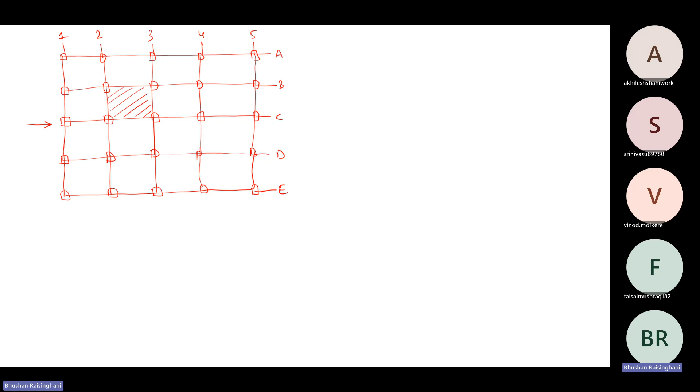Let's say this is the central frame that I am targeting to analyze. I will name the grid A, B, C, D, and E. And this will be 1. So it is 5 by 1, 2, 3, 4, 5 - a 5 by 5 grid. So in ETABS, when you enter the grid, it will be 5 by 5, or similar to what I have shared with you, you can use the same.

Now this is the frame of interest for me. These columns and beams are of interest for me to analyze in 2D. So in 2D, I can only solve this particular frame.

However, as per the soft requirement of the code, you have to do 3D analysis only for the building. So whatever 2D analysis you are doing is only for reference, comparison, and preliminary design. However, when you are doing analysis for any building, as per IS 1893, it is clearly mentioned to do three-dimensional analysis of the building. So you have to do three-dimensional analysis only. For that purpose, you will use the software.

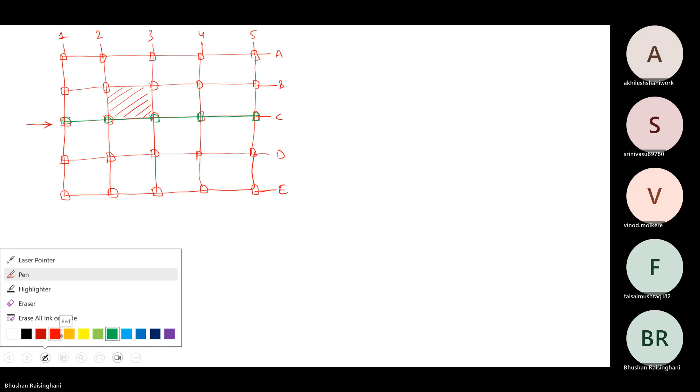So when you see how much area is participating for this frame, I will hatch that portion. This full area will not be participating. Half of the area on top, half of the area on bottom will come into picture - half area above the slab and half area below the slab. So this is the effective width you are going to consider for estimation of the load for this particular frame.

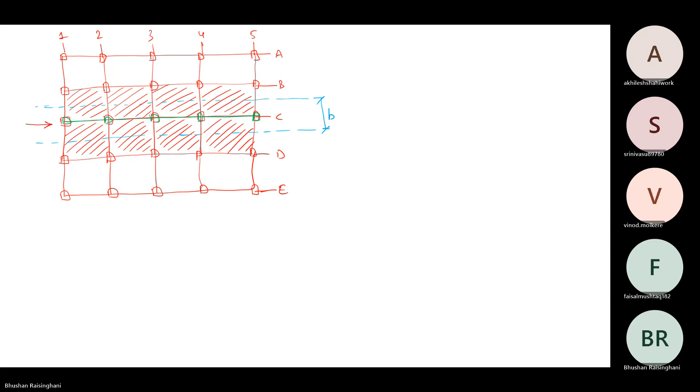Now, if you look into this arrangement, let me take this particular slab, which I am double hatching, for analysis. Because first, what will you do for this particular frame is the gravity load. So what are the gravity loads? First we have to list it out - gravity loads, what loads are required.

So in gravity load, we are using IS 875 part 1, that is for dead load and super dead load, and IS 875 part 2 for live load. Both you should have referred - what type of building it is, the type of loading changes. If it is an assembly building, institutional building, or a residential building, based on that the load criteria have been given. For different materials, the dead loads are given, density is mentioned. So that way you have to refer those codes, and from that you have to provide those loads. So in gravity load, now you know there is dead load, then there is super dead load, and there is live load.

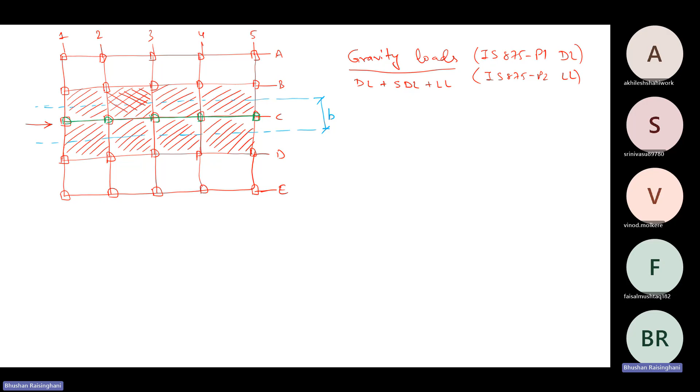And other loads, like there is a water tank load, and landscape would be separate from this, but it is part of super dead load only - though I am mentioning landscape separately. Then there is water tank, then there is landscape, and if any machine is there, so machine load you have to consider.

And there is another load that we take for a different type of arrangement, that would be for the HVAC, or your false ceiling. And other would be your elevator. So all these things we give under the super dead load, and some part, if some part we have to take as live load, we take it, but mostly this comes under the super dead load.

So, elevator - is it a live load or a dead load? That is the question. Has anybody seen the IS code? Elevator load, is it live load or dead load? Can anybody say on that? Sir, by elevator you are referring to lift load - yeah, that's called a live load.

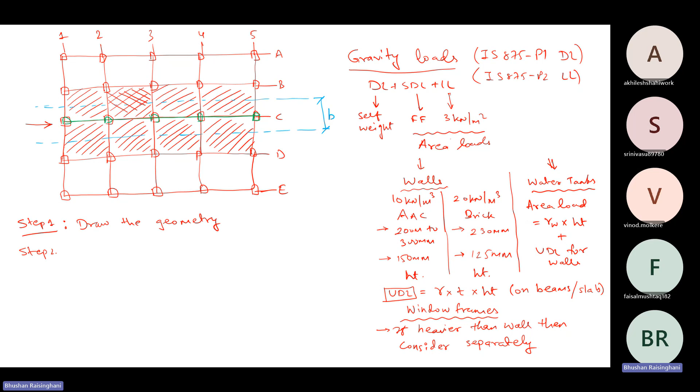So this is all under your super dead load. So what loads to estimate, you should know that first. Whenever you are doing the calculation, the first step you will write is gravity loads. You will list down what are the gravity loads you are going to consider. So step 1 is to draw the geometry. Step 2, enlist all the loads with category.

Step 3 is to estimate the loads and their reactions on the frame elements. Now we are on step 3 that we are going to discuss.

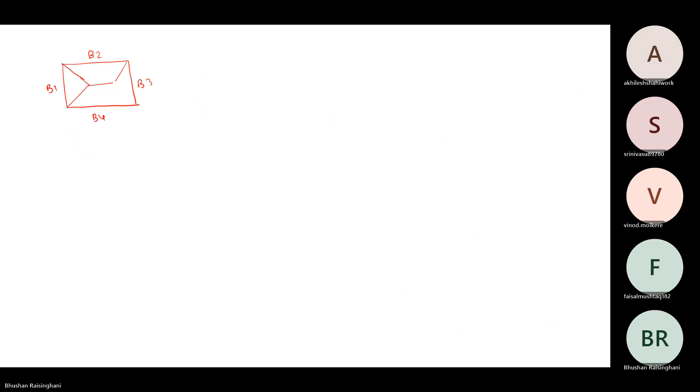So whatever I have highlighted, I'll take it to the next page. If I am on a particular floor plan, taking just one particular slab, I will label this B1, B2, B3, and B4, and this is a two-way slab. So the load distribution will be trapezoidal load onto B2 and B4, and triangular load on B1 and B3. This direction would be LX.

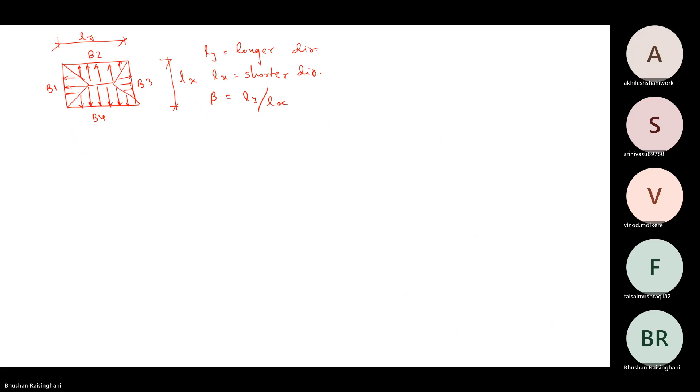This direction would be LY, where LY is the longer direction and LX is the shorter direction. And there is a factor called beta, which equals Ly upon Lx. I have shared these sketches because it is well known. Nothing is hidden about how this load is estimated.

So this way the derivation is given. In this particular case, we have to draw two beams. One is the smaller beam, let's say B1 oblique B3, because load is going to be the same, so there will be a triangular load distribution here. Then there is a longer beam, B2 oblique B4, which will have trapezoidal load.

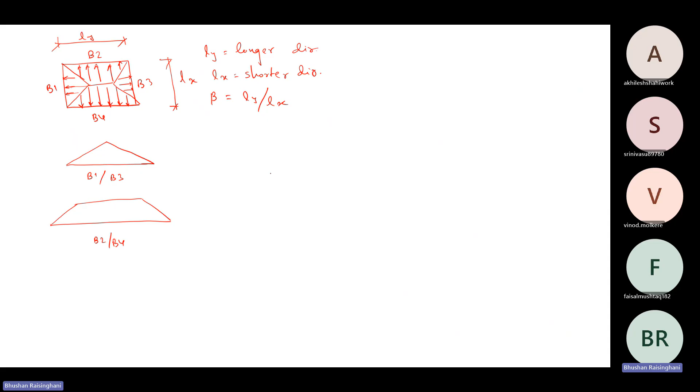Let me open what I have shared. So the intensity of load is going to be the same: Q into Lx by 3, Q into Lx by 2. Many different values are shown at different places. I have also shared two sketches for that. However, what I take in this particular case is given in the book of Shah and Karve also, that the intensity of the triangular load is Q into Lx by 3.

Q is the intensity of load, which is kilonewton per meter square. So whatever kilonewton per meter square load you have applied, you are going to distribute it. We are looking at the load distribution onto the floor for area loads. So this is the area load. Whatever the length Lx is, you divide by 3 into Q, you will get this particular load intensity.

Now you know you will have to calculate based on the triangle, whatever the CG is there, based on that how to estimate this force, and bending moment you need to estimate. So in this particular case, what is the value of the force?

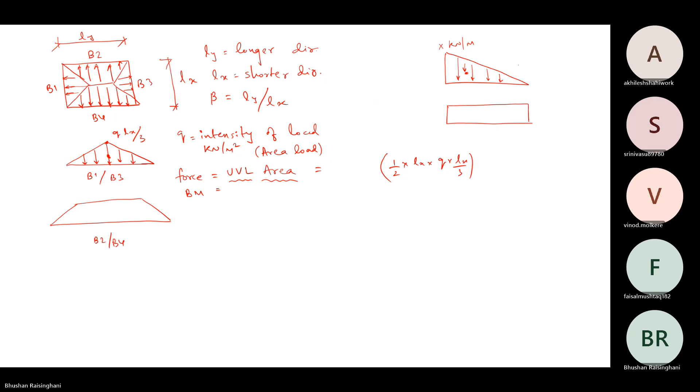So I will draw similar for this also, this way. This is also X kilonewton per meter. So this area is equal to 1/2 into X into L. This area is equal to X into L. So is this equal to force or not?

Yes, sir. Now if I have to take the moment for this, that is a separate calculation. So in this also, if I apply the same logic, it is 1/2 into Q into Lx by 3. Height into base is your Lx, so that will be Q into Lx square by 6, right?

So force applied directly in the center. Now there is another case, that there is an equivalent UDL. So this was a UVL that we did the analysis. Now if I want to draw equivalent UDL for this, I don't want to make a triangle, I want to convert it into an equivalent UDL.

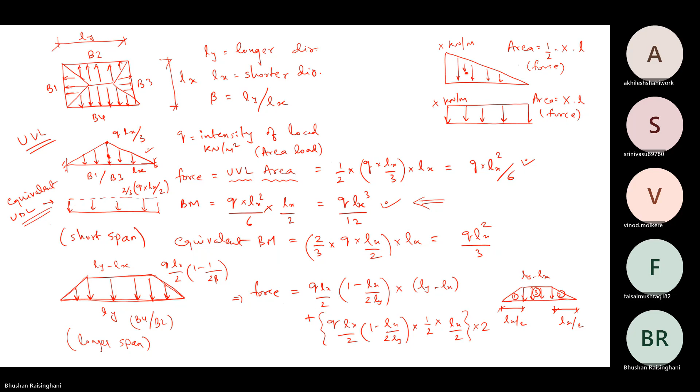So is the load distribution and calculation of the force and bending moment clear to you? Then we can move to the next step. So this is for two-way slabs.

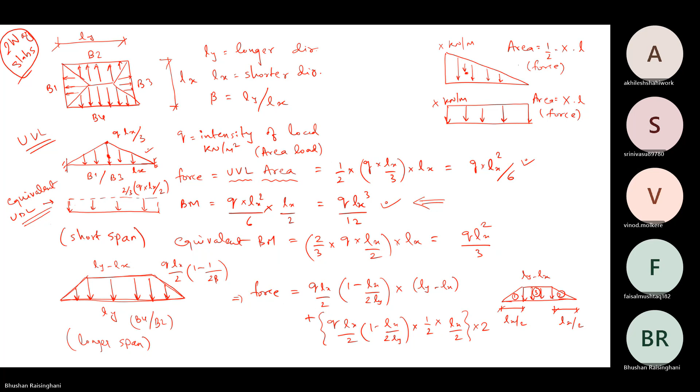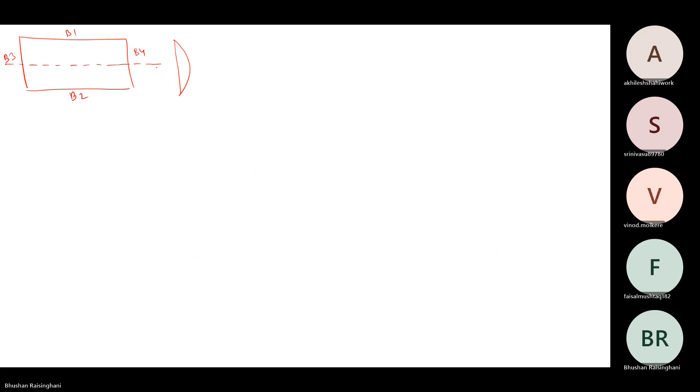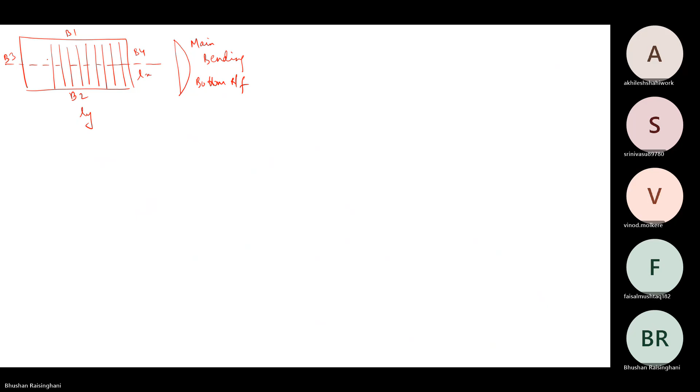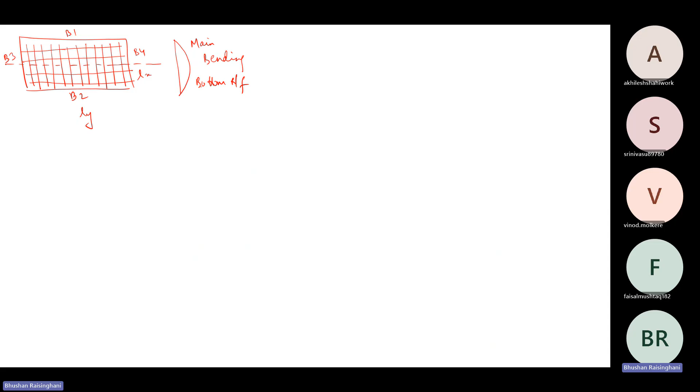So the bending direction is this, the main bending. So bottom reinforcement has to be in this particular direction. If this is the bending that is happening, the reinforcement will be like this. This will be the main reinforcement on the one-way slab, and this direction would be the secondary reinforcement, which may be at higher distance. We call it distribution steel, and the bending will be like this, with distribution steel provided.

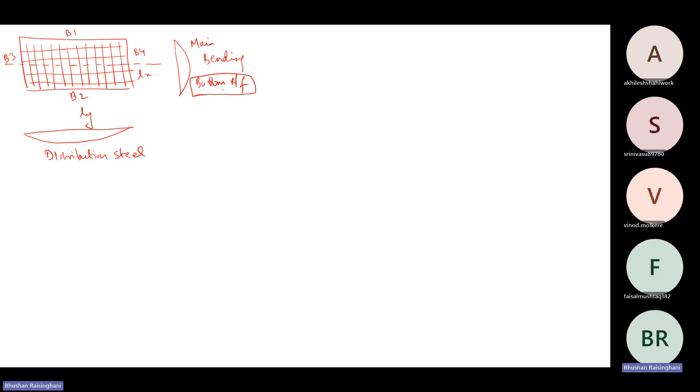I hope the reinforcement distribution is clear to you. Main bending is in the minor, lesser direction, and the bottom reinforcement has to come first in that direction. So this will be the bottom reinforcement you will be having. First you place the one reinforcement which is vertical, and above this vertical reinforcement you put reinforcement number 2, which is distribution steel in the horizontal direction. That is how it has to be provided.

If we see a slab which is a one-way slab, if this is the bottom reinforcement, this is your reinforcement 1, and above that this reinforcement is shown as reinforcement 2. So is it correct or not, is this correctly made or not made? Correct, sir. Correct, so if this is Lx, then it is correct.

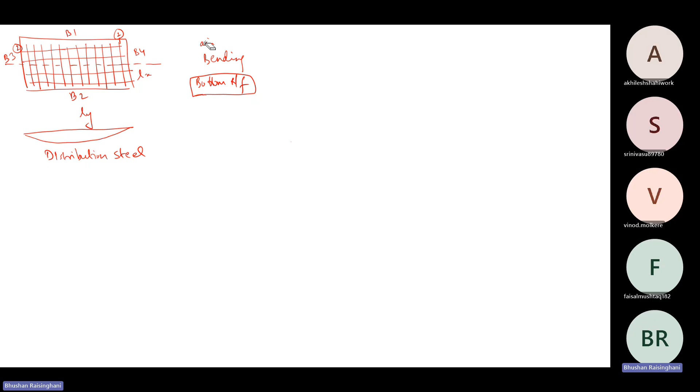Not a span. So that way, that is the detailing part, how the bending is taking place. That is also critical. Where is the main bending happening in a one-way slab? Now the load is equally distributed on B4 and B3.

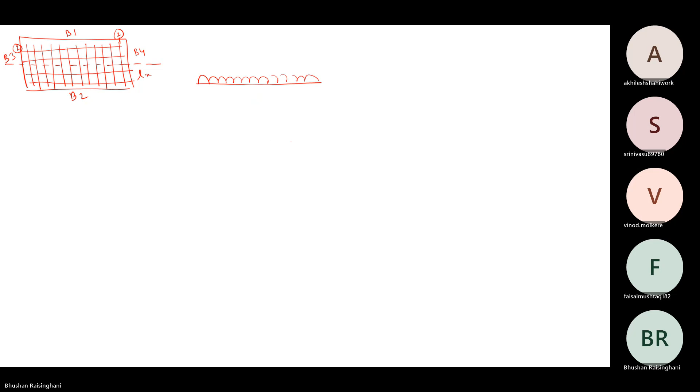So we have to make a beam, give it B3, B4, which is a shorter span, but 100% load distribution is on the shorter span. And this will be how much? It will be Q into Lx by 2. So these are the reactions you will get, this is a fixed beam, I think, taking it here.

So this way you will get the bending moment and shear force from this particular beam. These reactions are critical. Once you get these loads, which are the gravity loads - dead load, superimposed dead load, and live load - they may be area load, UDL load, or UVL load. Once you estimate all the loads and put them onto the beam, you can apply the beam reaction method to obtain the final result, case 1.

That is a very simple and also approximate method. Another way is we can go for the moment distribution method to solve this entire bay. So you can choose your method. Also, I would suggest you do a comparison between the beam reaction method and the moment distribution method, to see which gives you a better result, right?

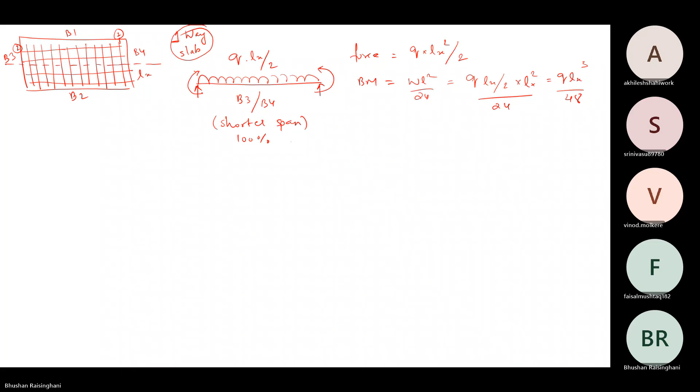So should it be WL square by 24 at the center? Is it like this or what? Is this right or not? It is the bending moment, directly the value is there. Or if I go something like this, Q into Lx by 2 into Lx, this is the force, into Lx by 2, then this answer would be Q into Lx cube by 4. What should be taken? So which is correct from these two?

Anyone? These are very simple cases we are discussing. Can anybody say which is correct? So this is the central moment that I have written. Now if I make it for the ends, this is the end bending moment. So Q into Lx by 2 into Lx square divided by 12, just half of it, Q into Lx cube by 24. This will be at the end, not in these two. Which is the correct bending moment? This is the mid.

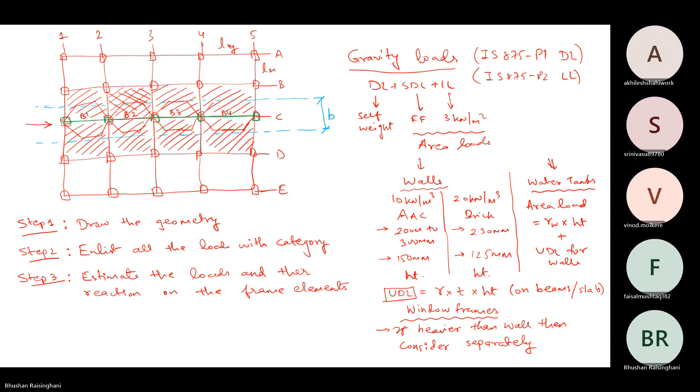So this much is the load that is coming onto this particular frame. So this beam will have these gravity loads coming from it. So all these loads are the area loads that are coming onto it. This area load is dead load or self weight of the slab. Self weight, and this area load is floor finish. Then live load is also there. If water tank load is there, that also has to be considered in the area load.

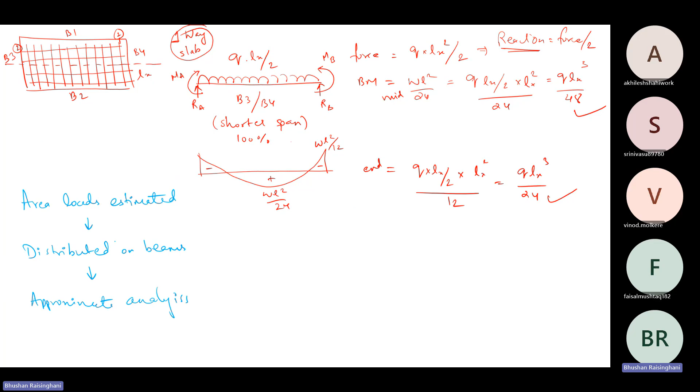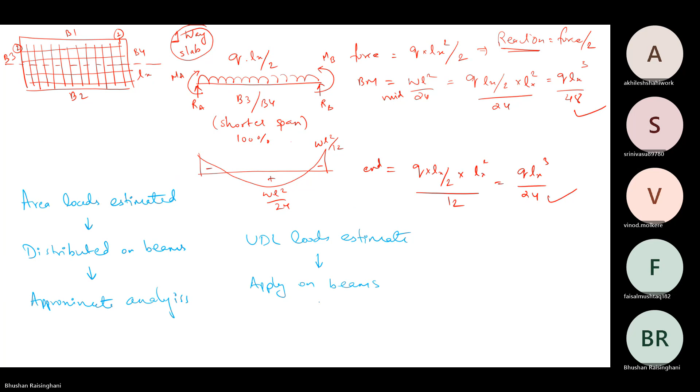So what we have seen is for the area load distribution. So once those area loads are estimated, then they are distributed on beams, and from beams, what we say is that you can apply the approximate methods of analysis for area loads. Now, when it is UDL, you estimate the UDL load, apply on beams, and then do approximate analysis. So you have to total all these loads that are coming onto the beam. So you have estimated loads.

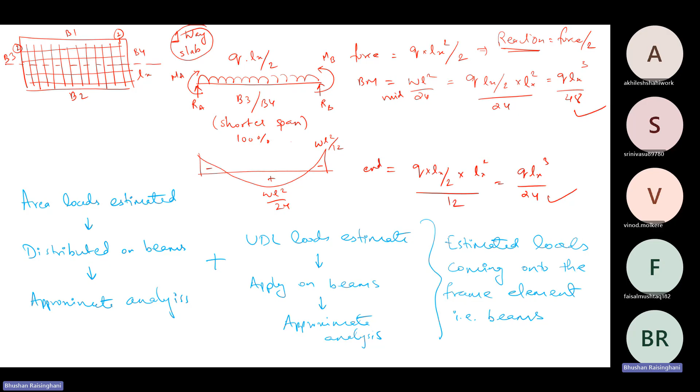Which is the frame element that is taking the loads are the beams. So you have to estimate all loads coming onto the frame element, that is the beam, and then transfer it to the columns and from columns to the footing. So that is called the beam reaction method. One is the beam reaction method.

And this is the most common method that is used. So whatever the load you have estimated on a beam, that is the UDL. Also point loads may also be there that are to be estimated.

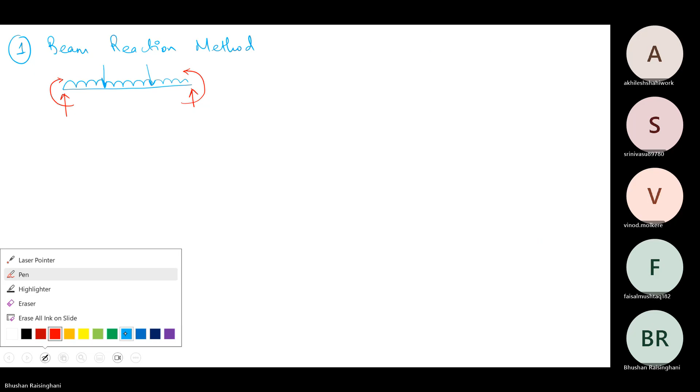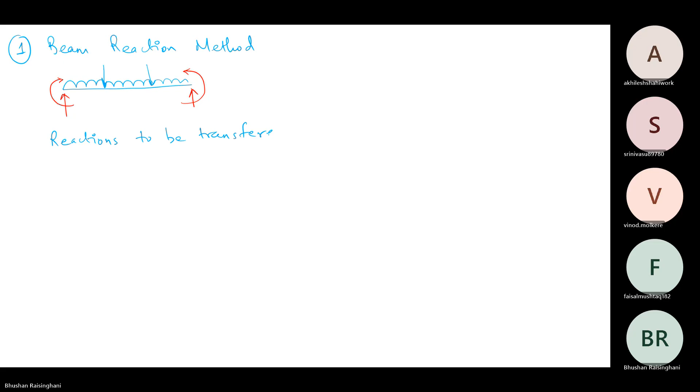I'll draw reactions with a different color to focus on what is the requirement. So these forces are the required product that is to be used in the beam reaction method. So these reactions will be transferred to the columns.

So in gravity load, there is no stiffness difference in the column, and hence we are dividing it appropriately. However, you also know that in which direction you have to consider the loads, you have to take it that way.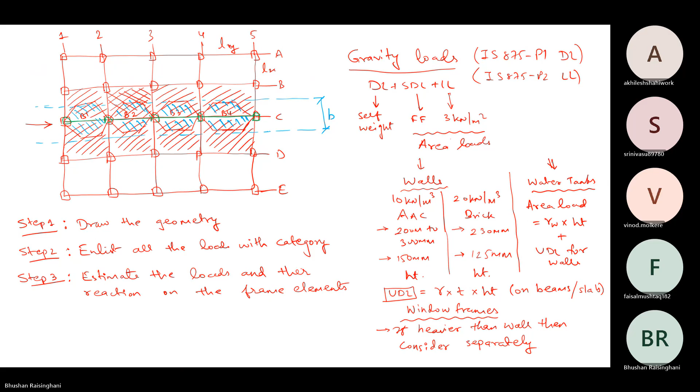So in one direction, I had marked this blue strip for the estimation of the loads. This blue strip is in this direction, meaning these loads are estimated. The strip can be in the other direction also. So you have to select the direction of the strip for estimating the load. I hope I am clear on that particular case.

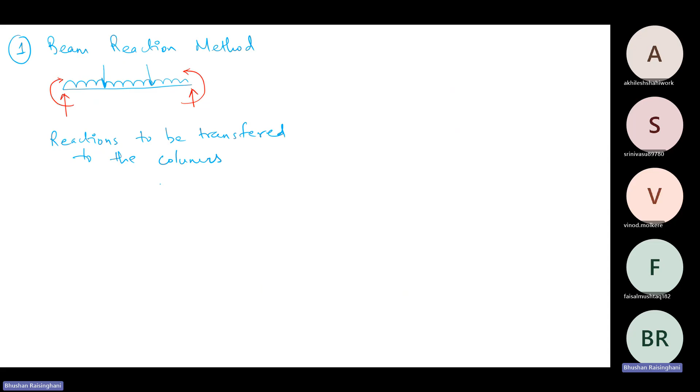So one-way distribution, two-way distribution, how it is going to be, how you estimated the strip. Now reactions are transferred to columns, then from columns to footing. And that is the base reaction.

So the hierarchy is like this. This is the slab that we had considered, the floor we had considered. We had beams below these floors. And we have taken the reaction for all the beams that are coming, including the moments also. You can consider all these moments that are available. So all these moments and reactions we have taken to the beam, and from beam we have transferred it to the columns.

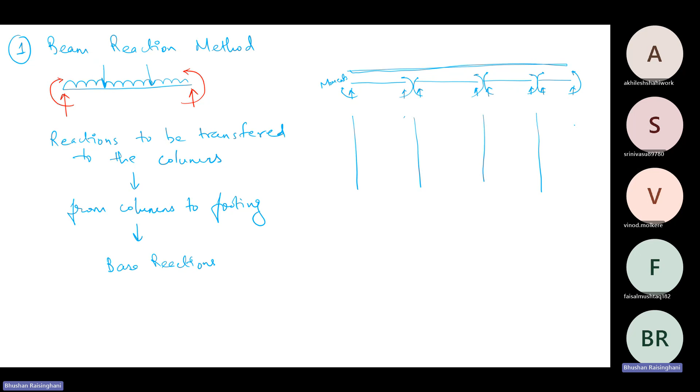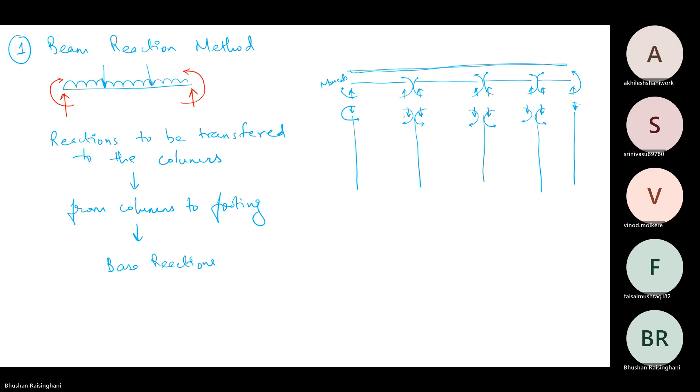That is a single column which is taking two loads. This is the way. So this direction, the direction becomes opposite. And at the bottom, you will get again the opposite direction.

And then it goes to the footing, and in the reverse order it will go to the footing, and the footing will take this particular reaction like this, from the bottom.

So the hierarchy is like this: this is the slab loads including self weight. Then these are transferred to the beams, so beam self weight plus slab loads. Then that is transferred to the column, so column self weight plus beam. That includes everything. Now here it goes to the reaction.

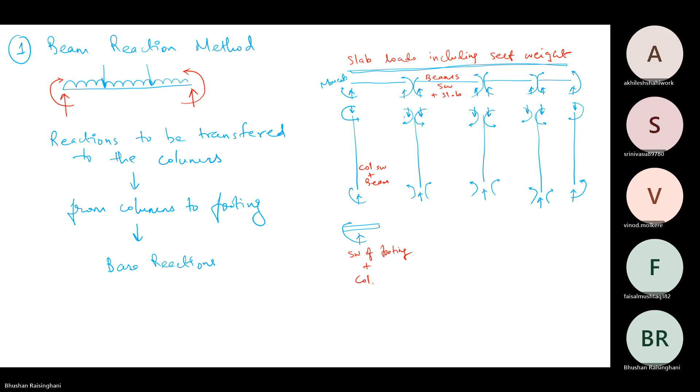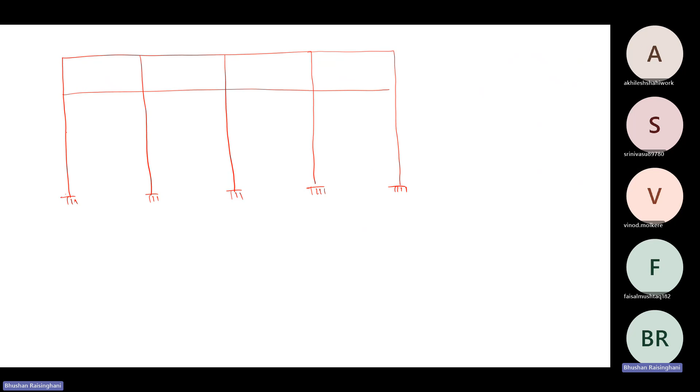So what we have to do now is draw a particular frame, that I had shown as an arrow. Now we have to plot the number of stories. So it is a 4-story building. First you have to estimate what?

You have to estimate the gravity loads coming onto these beams, which will be higher or it may be lower, depends upon the case. Whatever point loads are coming, wall load, glass load, other loads, whatever are coming, you have to put it here.

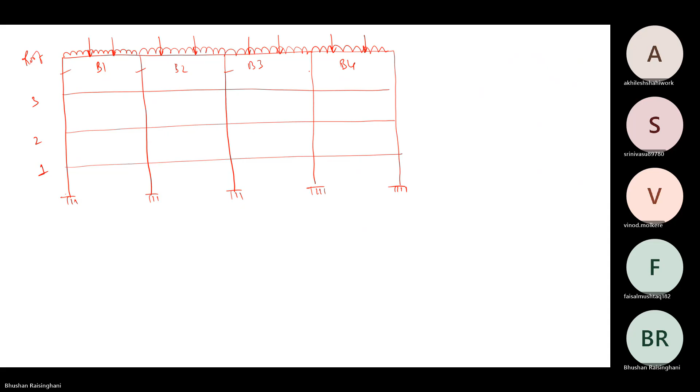Now there are 16 beams that you have to consider, and cumulative-wise, you have to keep on transferring the reactions up to the footing.

So you will get a reaction at the bottom. Any doubt in this particular method? Anybody has a doubt on how to estimate the loads - area loads, UDL load, and point load - and how to transfer these loads? So any query in this particular case?

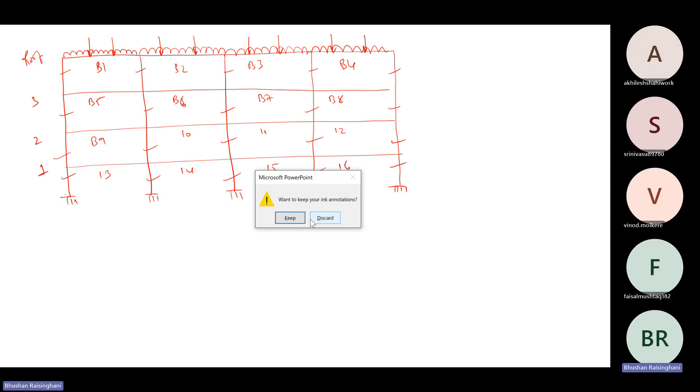Okay, so we'll close the moment distribution method part here. I'll now open what I had shared with you in the approximate method. This had a substitute frame method shown here, and the moment distribution method is given in this literature, which has to be followed. This is the method most commonly employed, called Kani's method or moment distribution method. Substitute frame method is necessary to estimate the maximum and minimum loads coming onto the floor, positive maximum and negative maximum, so substitute frame method is needed.

Now, second is the portal method, which is also given in detail. However, portal method has the assumption - I had shown you the book of Adrian Scarlett - that zero bending moment is going to be in the center. This is the routine portal method assumption. However, in the book of Scarlett, this point of zero moment, ZMP, is to be estimated from the graphs.

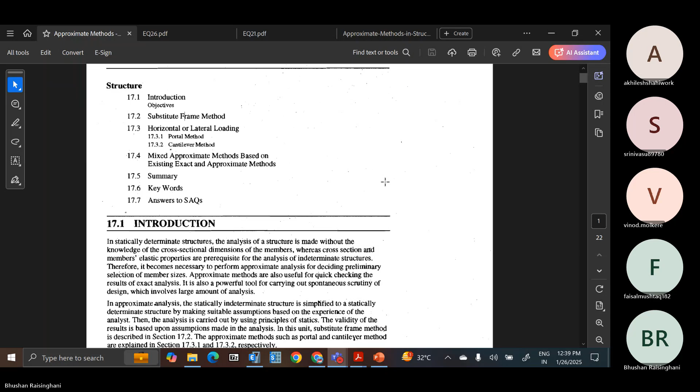So it is clearly mentioned in this reference, and in any reference you'll see for substitute frame method, you would have seen this previously also: we take half story from top, half story from bottom, and represent here. So here they have represented this particular floor, where they have taken a full story - this much story they have considered to analyze. So this has been drawn here to evaluate this moment distribution method, how to apply it and what are the maximum minimum bending moment values. The cases are to be demonstrated.

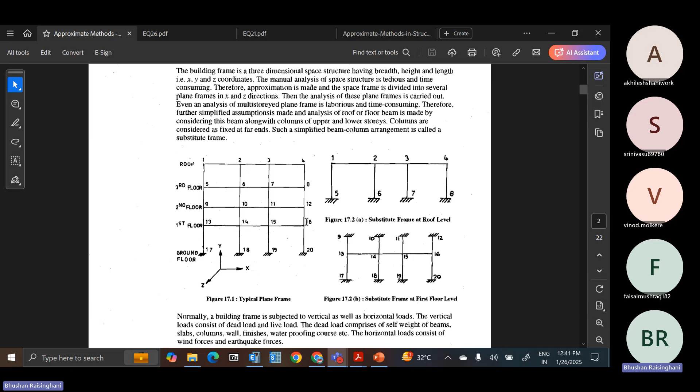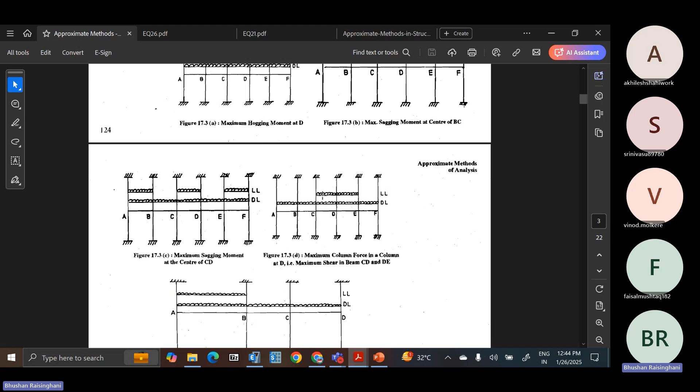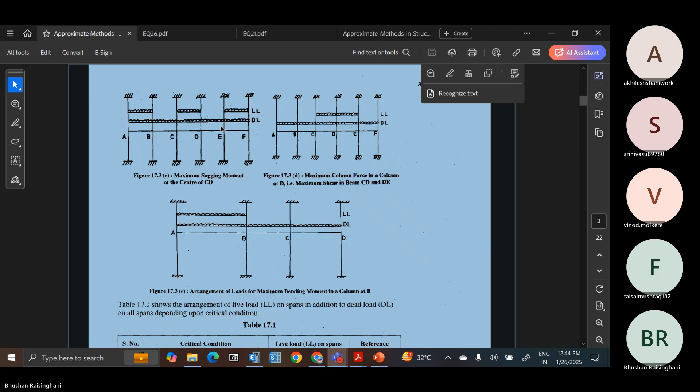For column B, this is the case you can see in center CD, so in the beam arrangement, say, right now what we saw is the two cases, that is for the center span CD to have the highest sagging, and to have the highest hogging bending moment, CD and DE. So this much for negative and this is positive.

Now if I want at other joints also maximum positive and negative, then what I have to do, so what will happen here, this will have higher bending. So higher bending, I think so. We will get moment like this and something like this.

So what it is showing is the arrangement of loads for maximum bending moment in a column at B. So at B, there is a negative bending moment, right, always not a positive bending moment. So the highest negative moment you want at B, then you apply on that span, either interior or exterior, in that case B will have the bending moment in that particular order.

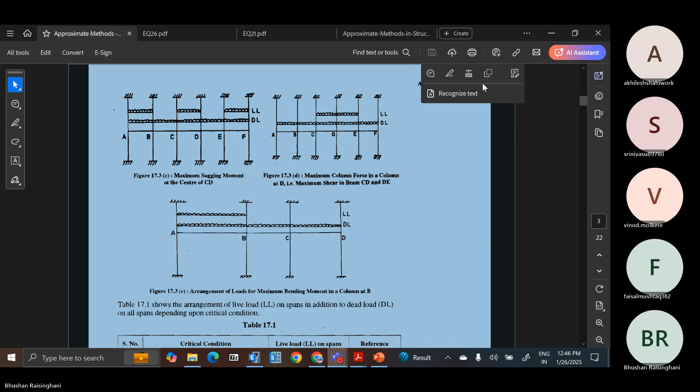So they have given a table in which they have explained the various conditions that everyone has to apply, like maximum hogging moment at D. So live load apply at DE and CD, that means continuous two spans. You apply the bending moment and you will get the maximum hogging in the center.

Maximum sagging moment at B: apply the live load at BC and DE, these are the alternate spans for sagging. Now minimum sagging moment at center of CD - so what is the minimum sagging and what is the maximum sagging? Minimum sagging you will apply at AB, starting alternate span CD and EF, then there is minimum sagging moment at the center.

Now maximum axial force in a column at D, that is maximum shear in beam CD and DE, so CD and DE you have to apply. So CD and DE, same case, continuous two spans for column maximum shear.

Now maximum moment in column at B - so one case we have estimated for beams, one is for the columns. So two cases we have to create, one is for beams, one is for the columns. So this is how it has been shown. So for both cases you have to refer - for columns, what is the case to be taken, for beams, what is the case to be taken, for highest bending moment and shear condition.

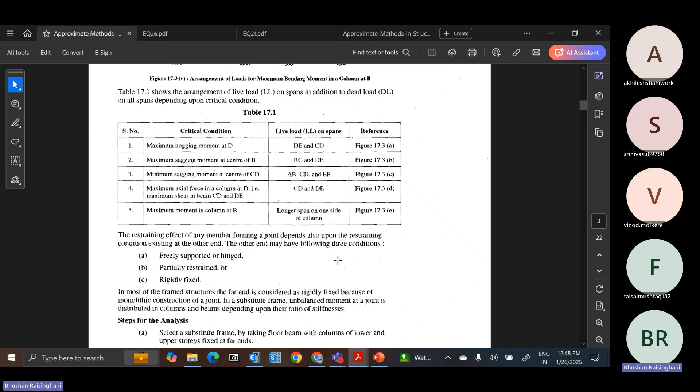This I had shared, I think last week, before that maybe. But if you have gone through that or not, I don't exactly remember. But these things have to be considered while application of the load. This is very critical because after this only the moment distribution method can take place, or this next analysis can take place.

So what are the steps for analysis? Select a substitute frame by taking the floor beam with columns of lower and upper stories fixed at the far end. Cross-sectional dimension of beams and columns may be chosen such that moment of inertia of beam is 1.5 to 2 times that of the column, and find distribution factor at a joint considering stiffness of beams and columns.

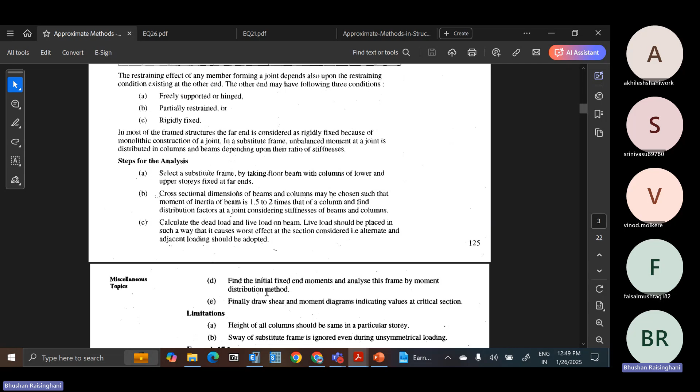Calculate dead load, live load on the beam. Live load should be placed in such a way that causes worst effect at the section considered, that is alternate and adjacent loading should be adopted. Find the initial fixed end moment and analyze this frame by moment distribution method. Finally, draw the shear force and bending moment diagram.

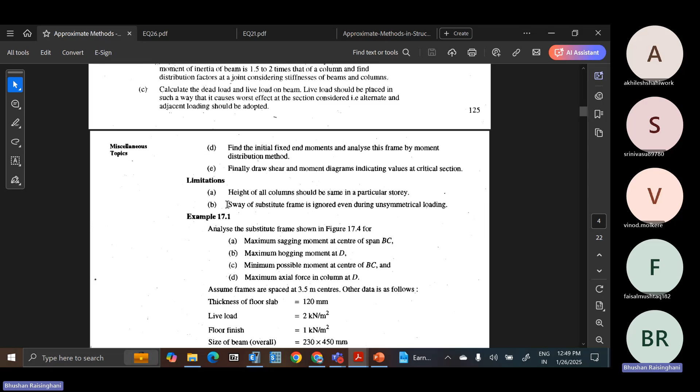So in this method, sway of the substitute frame is ignored, so you are not considering the sway effect. So you analyze for gravity load, then do a separate sway analysis for the frame, which is very difficult to do as it is a very big frame, right?

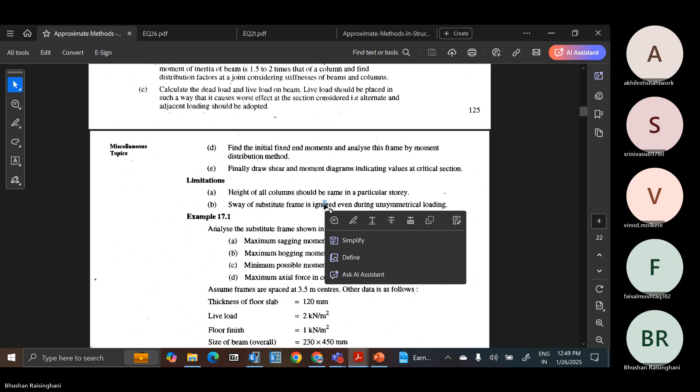So they have given a fully analyzed problem in which the floor slab is given, live load, floor finish, beam size, column size, as been mentioned, and a typical floor has been taken with floor heights. They have estimated live load on the beam, dead load, floor finish - this is to be estimated how I explained to you.

Now this is I of the column, this is I of the beam, so you have to select I of the column and I of the beam, and orientation of the column, how it is placed. For that, I had made a frame for you in ETABS. So this is a square column I have considered right now. Either you can take this or you can update the column sizes in the software, decide accordingly.

What is the column orientation and what is the size of the columns or the beams. So you basically need the stiffness, for which the assumption of the sizes is necessary. Now in this case, how will you do the initial sizing?

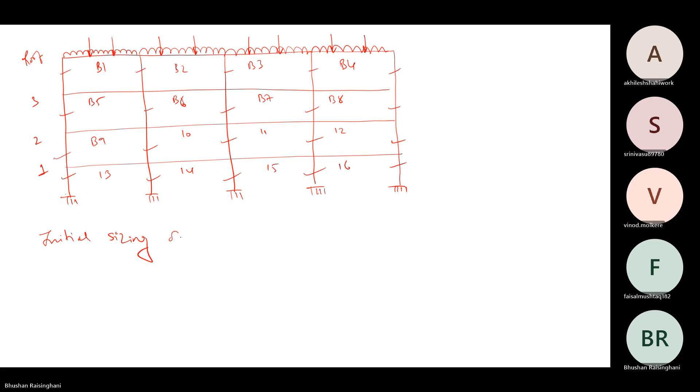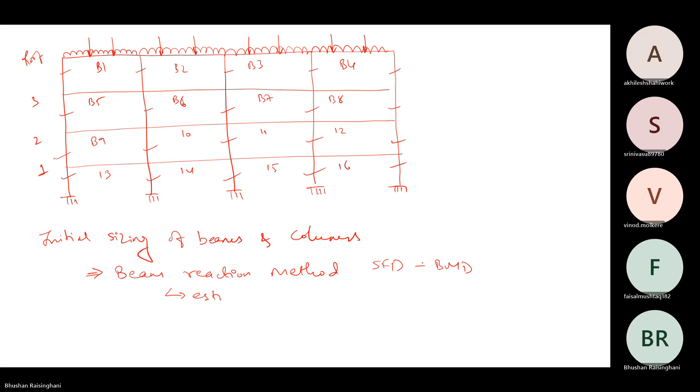So if I go by initial sizing, what you can do is initial sizing of beams and columns for gravity loads. Now when you go to beam reaction method, you can get the SFD with BMD for the beam.

So you can estimate beam size from that particular forces for the beams. Now same, when you get the force in the columns, estimate column sizes also. So that is the benefit of beam reaction method. At least from the reactions, you can estimate the initial beam and column size. Otherwise, you can assume, but how many times you will assume, that will become a problem.

So in that case, another method is by using the thumb rule. Sometimes people use a thumb rule, or they create their own thumb rule based on the practice they have already considered in past problems. From that you can estimate, let's say for beam, length divided by 12, you can take the depth of beam. Or it sometimes becomes L by 10 also.

Now for column, how will you estimate the initial size of the column? Any thumb rule for that? So you can take it from ductile codes, like B by D should not be less than 0.45. Width we can take equal to beam width. Rather, I would say play with the stiffness. You have got B by D of the beam, increase 1.2 times or 1.1 times for the column for initial case.

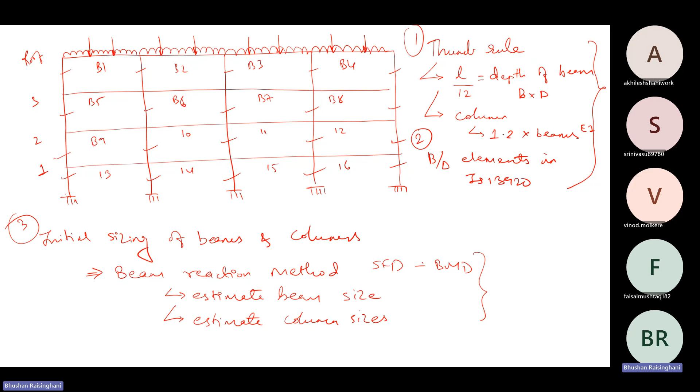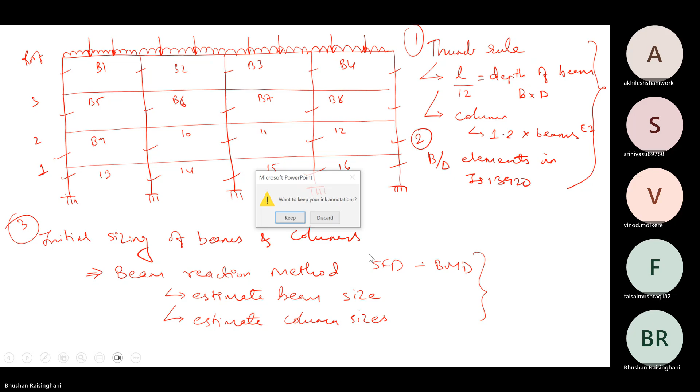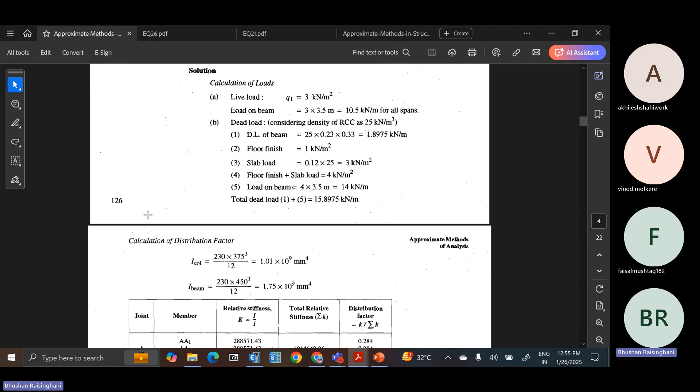So this was regarding the gravity loads. I'll open again this particular literature. Once you get the I of the column and I of the beam, now you write the joint, right? In moment distribution method, you write the joint — what are the members, AB, for joint B that is AB and BC, and let's say above member is BB1, BB2 that way. So this is AA1, AA2, top and bottom columns, and AB is the beam.

Now you give relative stiffness, I by L or I by H, depends on that. For each element at joint A, joint B, joint C, joint D, all joints, all members connected, I by L. Now you total the stiffness. Now give the distribution factor for the 3 members connected at A, 4 members connected at B, 4 at C, D, E. Once you get this, the moment distribution factor.

Then you are having the maximum sagging moment at the center of BC. What is this case? Is W max 1.5 dead load plus live load, and W minimum is dead load? That is the service case — so serviceability case and strength case, 2 moments are estimated here.

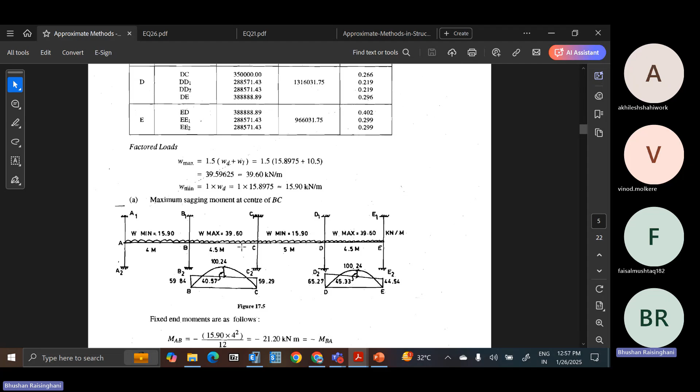And this is a UDL applied. Now there is no point load here. You can also choose based on the particular case. If the moment is roughly the same on two sides — here it is different. Now from where these moments have come, that we have to see.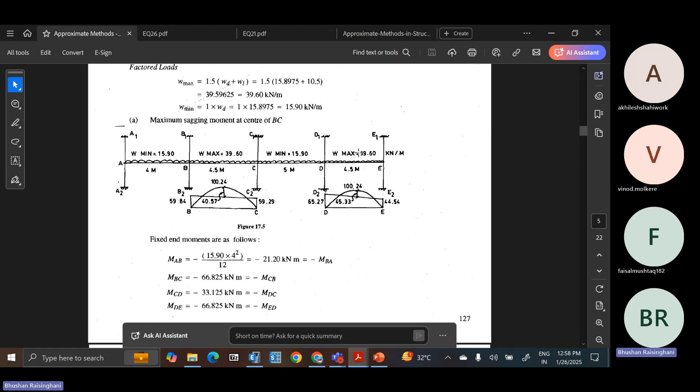Now this is the fixed end moment you will take, right, WL square by 12, or fixed end moments. Now M of AB: fixed end moment at A is 0, fixed end moment at B is WL square by 12, where W is 15.90, that is only dead load, into L square by 12. Then MBC, again WL square by 12, L square by 12. At E and A, the fixed end moment is 0.

Now I will take the joint distribution factor that we had estimated. Fixed end moment is only in AB because the load is at AB, and because A is pinned, it will not have AA1, AA2 will be 0 fixed end moment. Only at AB because BA member has a fixity, so we will have a fixed end moment here.

Now this total moment will be distributed in 3 members: 6.02, 6.02, 9.16. That is the first distribution. Now carry over half, you will give it to BA. From AB to BA, you will transfer half, and from BA, you will give half to AB.

Now this 7.12, the sign has changed while transfer—the sign does not change, right? So where does it change? Fixed end moment was negative, distribution is positive, transfer is positive. Now from positive, again when you distribute, it becomes negative. Same distribution factor, and transfer negative. So here it is negative, here it is positive—from positive to negative, from negative to positive when you distribute it.

And finally, in member AA1, AA2, it is 3.98, 3.98, and AB it is minus 7.96. So for 3 members you got the bending moment, and for 4 members of B you got the bending moment.

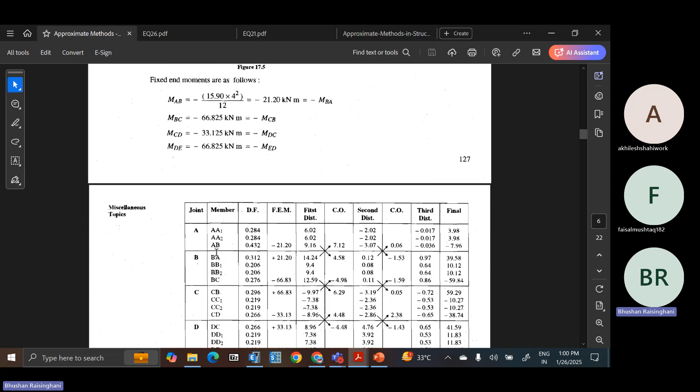Now, once you get the moments in all the members of a floor in a substitute frame, that is for the maximum case of maximum sagging bending moment. So you have to create that load case of maximum sagging, apply the loads, do the moment distribution method, and get the moment in all members.

And the second case is maximum hogging moment at D in the beam, and maximum axial force in column at D. So it is at D, but it can also be C, it can be B—all those things you have to estimate. So maximum force is going to be in this zone. That's why they have taken only one column to estimate the size. As such, you have to do it for all columns, but this is the maximum case.

Again, fixed end moment they have estimated and put it in the table, did the distribution, and found out the forces in all elements in the substitute frame in a floor.

Now the distribution factor of the upper column and lower column is the same. Therefore, several steps in moment distribution method are common to both at a joint. So if it is joint C, D, and E—at C it is CD, at D it is DC and DE. So this is joint D in which the members are CD, DC, and DE.

That way it has been mentioned. And E is equals to ED. And for C, it is equals to CD. That is what they have considered. As such, one more number is this.

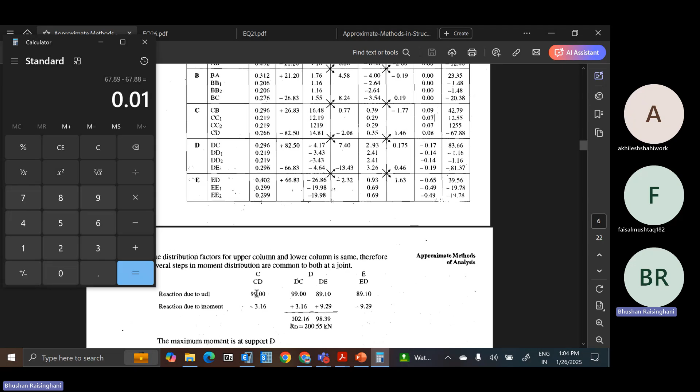As such they are neutralizing each other. Now from CD they have written the moment due to reaction due to moment as minus 3.16. This was plus 3.16 minus plus 9.29.

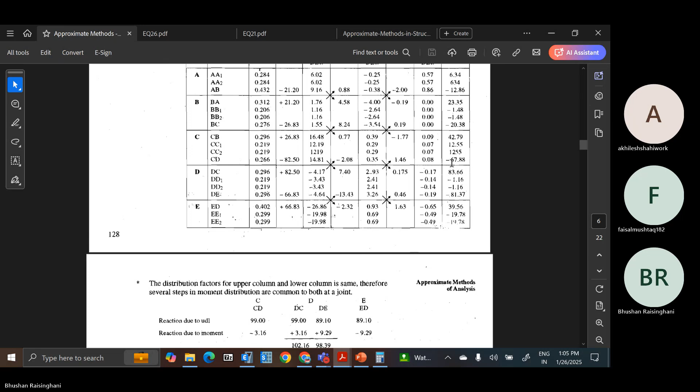I think there is some iteration done in between. You just have to transfer the moments for all the joints and get the reaction at D. So what is the reaction due to the moment and what is the reaction due to UDL? You have to total it to get the reaction on the column.

So that I had shown in the sketch to you, whatever force is coming onto the column, you have to take it. So this is the point load coming onto the column, due to the moment and due to the reaction. So this is the total force that will act on the column point load at joint D.

So you have to convert the moment into reactions, and also what is the gravity load coming, that is also you have to take. So reactions due to the moment and reactions due to the UDL, both are to be converted to a reaction force.

So maximum moment at support D is 83.66, which is written here, 83.66, and DE is 81.37. This one, 83.66, 81.37, negative and positive.

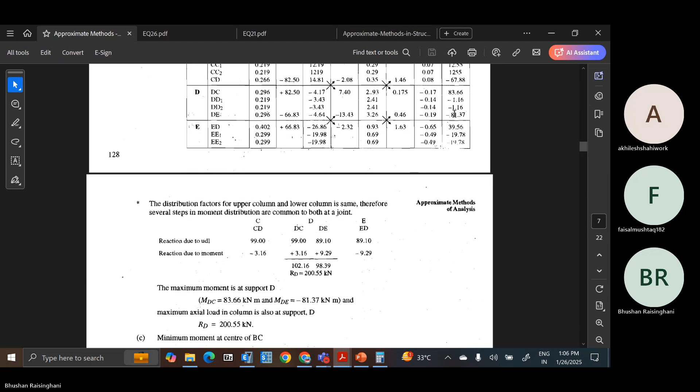And axial load in column is also at support D, which is 200.55. So maximum moment and maximum load has to be estimated for the column joint.

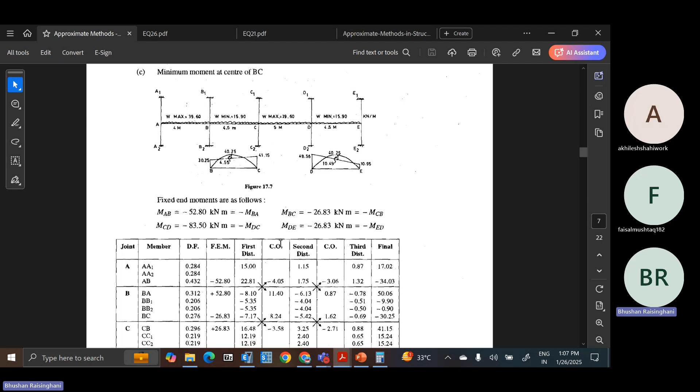Now minimum moment at center of BC. Third case, maximum moment, now minimum moment. You have to consider that load case where the minimum moment was estimated. The rest procedure is the same.

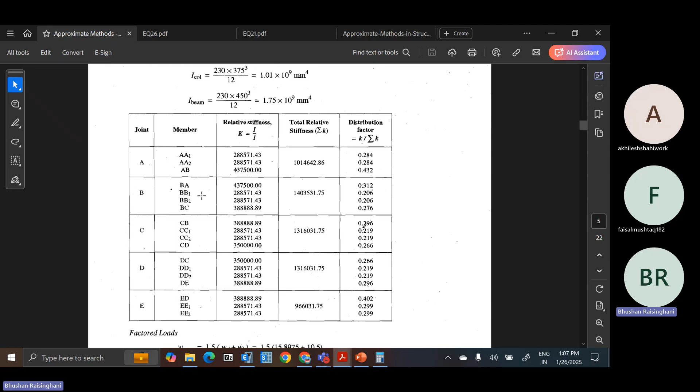So what load cases have to be created to solve the problem have been mentioned herein. This is the same, has to be followed for all the cases.

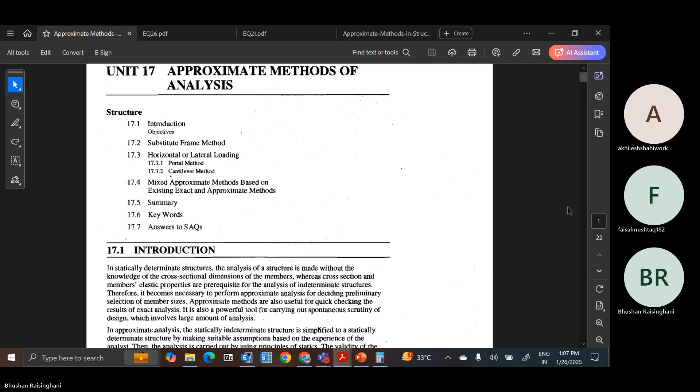Using substitute frame method and moment distribution method, we see the other method that is mentioned. The portal method also they have given, same has to be followed.

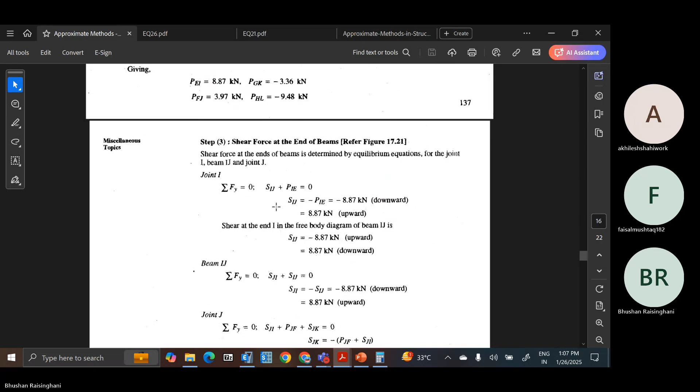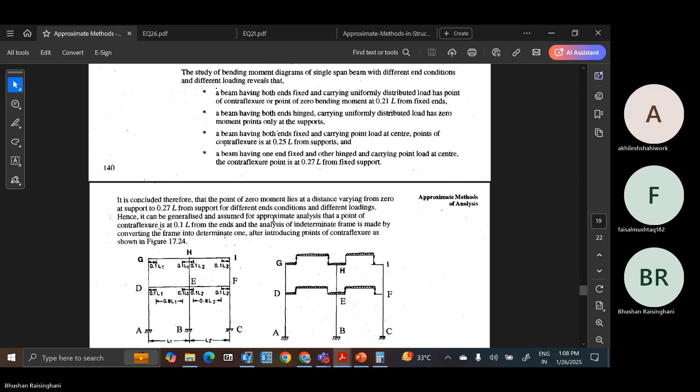The cantilever method is used for tall buildings which are more flexible, that have a cantilever action. In that case, we have to use cantilever method. So this is also there, but I don't think we should go into depth of this. So the method that we have discussed, you should use that as a routine procedure.

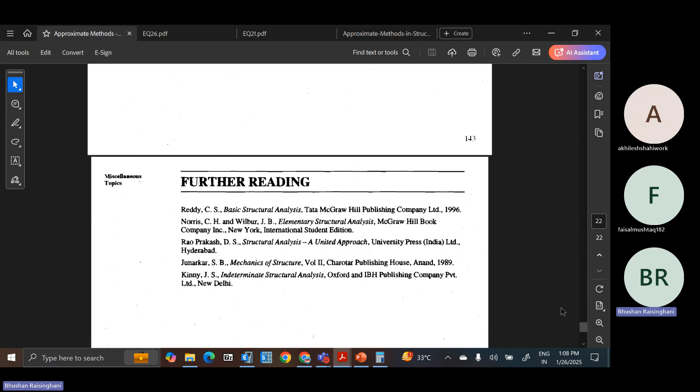So I hope you will solve that particular problem for gravity load first. For lateral loads, whatever the shear wall position is there, what is the force coming onto that wall, you have to estimate, that we have done already in the last session. And force distribution on the frame, force distribution on the shear wall or lateral forces when the case of shear wall will come. But first target is you should estimate the gravity loads correctly and compare it with the software.

So that is the task for this particular week. And the same problem that I have shared, you can use it or you can create your own problem. Right, so any query in what we have discussed today?

This was a routine procedure. So I just wanted to know, have you gone through this procedure like I have discussed or not previously? Hello.